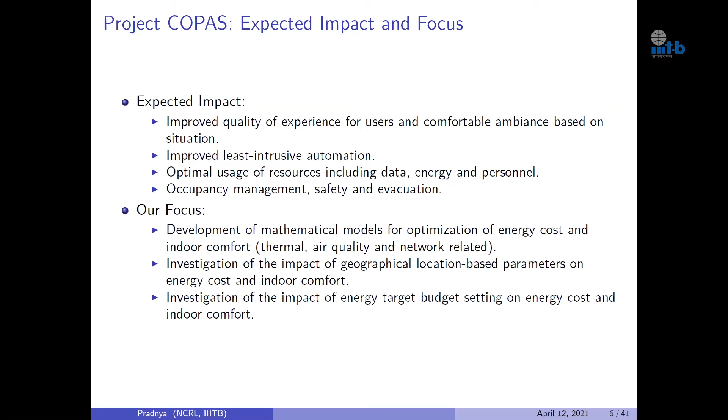We also have looked into the impact of geographical location based parameters on the two important objectives of energy cost and indoor comfort. Further, this work also investigated the impact of energy target budget setting on energy cost and indoor comfort. We will shortly look into what energy target budget setting means, and we'll get into the details of it. So, with this in mind, let's start with the actuals of the talk.

So, first, let's look into the concept of smart and green buildings. We have been hearing these terms quite often today, right? But smart and green buildings are a bit different from each other. We'll see how. Smart buildings are enabled with integrated technology. This is something which we all know. It also takes into consideration the aspects of occupancy management, that is majorly concerning the people in the buildings, the number of people majorly, and their activity, and they strive for operational efficiency, right?

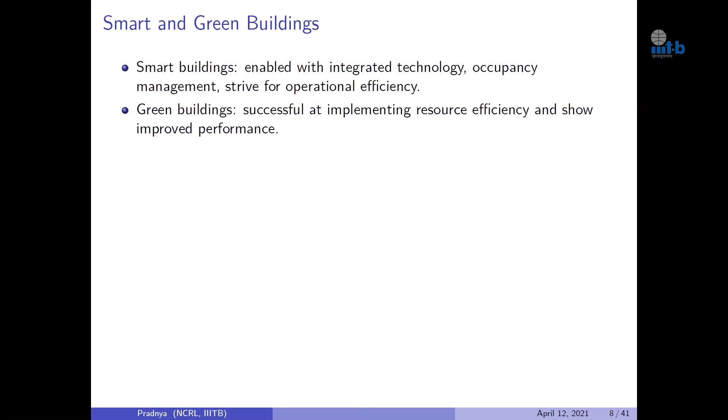But green buildings are the ones which are considered successful at implementing resource efficiency and have shown improved performance. There is a body which looks into the verification and certification of buildings. Basically, they are termed green only when a body called LEED, Leadership in Energy and Environmental Design, provides them with a certification. Correct?

So this is a small diagram which shows you what are the different aspects of green buildings and smart buildings and what things they have in common, correct? So as you see on the extreme left, indoor environment and comfort, energy, water, materials and resources, design and innovation, along with optimization methods, monitoring systems, measurement, commissioning, and control systems are the aspects of green buildings. And when the building has all these things in place is when they are given the certification by LEED.

The other aspects that make the building smart are basically related to the automation and technology that is there in the buildings, which majorly consists of the HVAC or the AC units, lighting, power, etc. So, this is what smart and green buildings are in a gist.

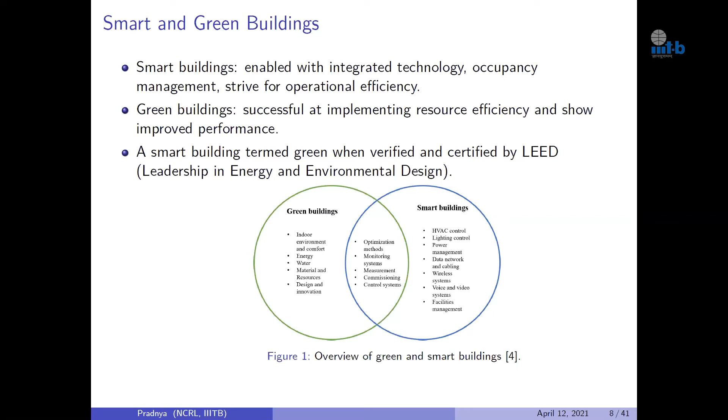So, moving on to the other important aspect of smart buildings today, which is Internet of Things, correct? Now, IoT or Internet of Things is majorly in place today to enable buildings with technology and integration, right? It includes the data network, the voice and video systems, the communication backbone, the things which are majorly concerned when we want to have a connected type of community today, which means one building has connectivity within its internal spaces, and it is also capable of communicating with the other buildings in the vicinity if required, right?

Not only this, but it is enabled with data collection from other groups of buildings in order to make sure that optimization strategies are in place, leading to a sustainable community.

Other terms that you might have heard regarding usage of Internet of Things in buildings are data analysis, software and cloud computing for policy making, security and privacy, of course, energy saving, and integration with the power grid, right? So all these aspects are covered under the umbrella of Internet of Things.

Moving on, now when we say we are talking about smart buildings, the other thing that comes into picture is something called the building envelope, right? And its thermal performance. Building envelope basically means the outermost structure of the building, which includes the roofs, the walls, the windows, doors, etc. Why this leads to the idea of thermal performance of the building is because a building is largely affected by its environment.

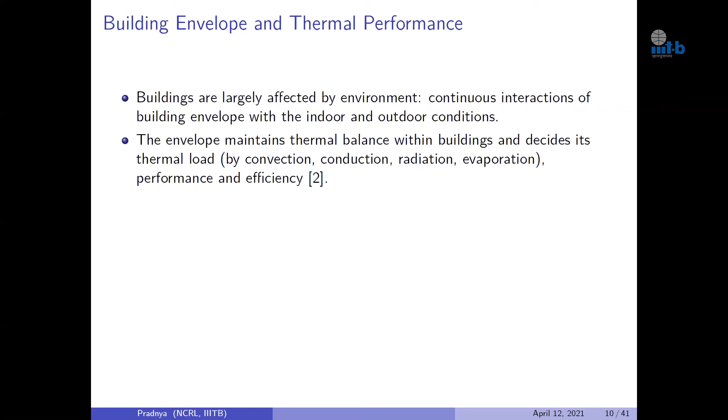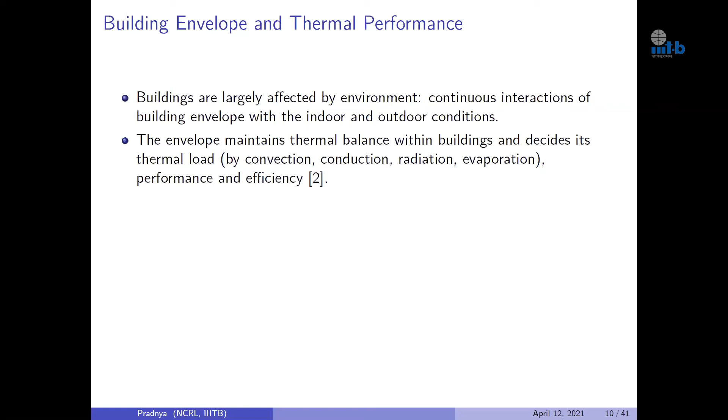It's not a standalone system, it is continuously interacting with the indoor and the outdoor conditions to which it is subjected, right? The envelope is responsible for maintaining the thermal balance within the buildings, and this is called the thermal load. You might have heard of terms like convection, conduction, radiation, evaporation, etc. As far as the various processes in the space are concerned, all these are applicable to how the building interacts with its environment, and they directly determine the performance and the efficiency of the building.

So, the other immediate effect of this is that it influences the choice of heating, ventilation, and air conditioning units in the building, right? So, depending on how big the building is, what types of materials are used in the building, the number of doors and windows, whether they are glazed, unglazed, etc. All this helps to figure out the capacity and the performance of the HVAC unit that needs to be installed in the building. So it directly implies that careful design and construction of the envelope can ensure efficiency and user comfort both.

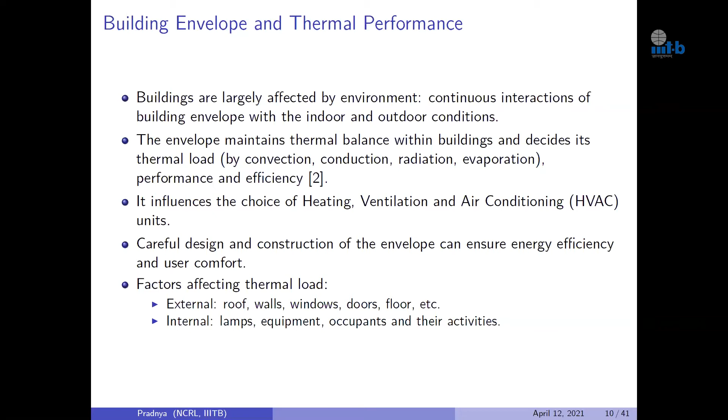As I said, the factors that affect thermal load include externally the roof, walls, windows, doors, floor, etc. And the internal factors include lamps, the equipment which is running in the building, occupants, and their activities, because all this basically goes through the different physical processes in the building, which are responsible for generating heat in the building, right? Which contributes to the thermal load.

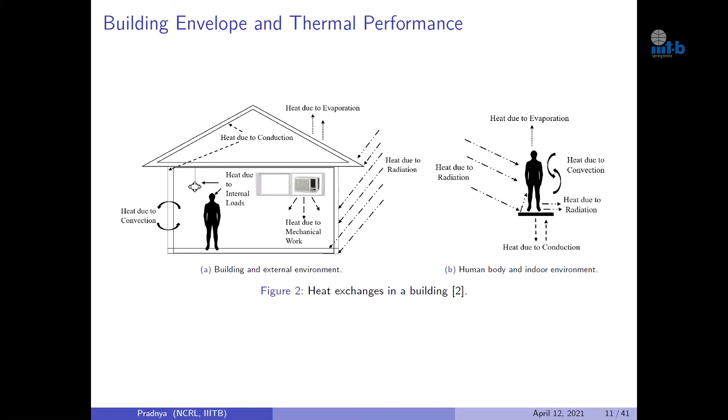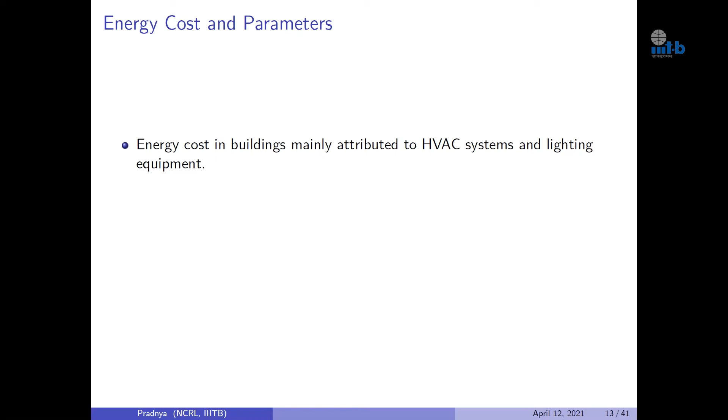Now we get into the two important objectives of optimization in buildings, which are energy cost and indoor comfort, right? Let's first look into the parameters that affect energy cost in buildings. So as I said, HVAC units are the ones which majorly contribute to the energy bills today in buildings. The other group of equipment which is affecting the energy cost is the lighting equipment, but it's not as much as the HVAC system. So mostly works focus on calculating the energy cost of the HVAC systems today.

So it requires us to describe relationships between the demand and supply of energy from various sources that comes to the building, right? So it might be the power grid, the solar energy, you have the backup batteries, etc.

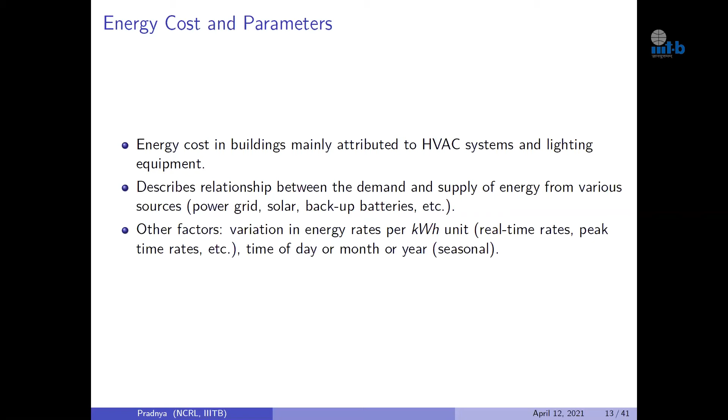Other factors that are included are how the energy is being billed in the given geographical region, right? So, what is the cost per kilowatt hour unit of the energy? So, like we have the slab wise billing that happens in India, there are also other types of strategies which are adopted in other locations, which include real time rates, the peak time rates, etc. And these keep changing based on the seasons or even maybe the time of day. So all these parameters are important when it comes to the calculation of energy cost in a building.

Further, looking into the indoor comfort and parameters. So, generally, indoor comfort includes all those factors which make a person feel comfortable in a building. So, the first thing that comes to our mind is the temperature and the relative humidity, right? And yes, these aspects are directly contributing to the thermal comfort dimension of the building.

The other factors that affect comfort are light intensity, the smells or the odor in the rooms, the CO2 or the carbon dioxide levels, etc., which respectively form the parameters which affect the visual and the olfactory comfort of users in the building, right? So it generally means that all these parameters, ambient parameters, have to be maintained at a desired level so as to have a comfortable environment for the user.

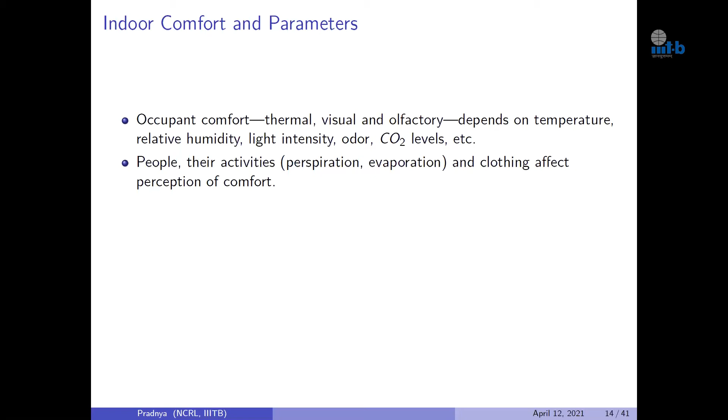The other thing that affects indoor comfort is the people and their activities, because this will directly contribute to how the person is feeling at any given point in time, and it might differ from one person to another. So it's quite subjective in nature, right? Also, the type of clothing that a person is wearing in a given building for the kind of a purpose that the person has been to that building, right? So, if a person is visiting the shopping mall, the person might be wearing very casual clothes, whereas if he or she is in a gym, the kind of activity that the person is doing is very different, right? So, all these factors come into picture.

The other aspect that affects indoor comfort are the type of models that people have proposed today in literature, right? So, one of the existing models is the Fanger's predicted mean vote model, which is called the PMV model for short, and its variants, right? So, this is one of the oldest model that is there in place today, and a lot of variations have been made to these. There is also an air quality model that is proposed by Fanger and which is widely used today. So we will look into both these things in some time.

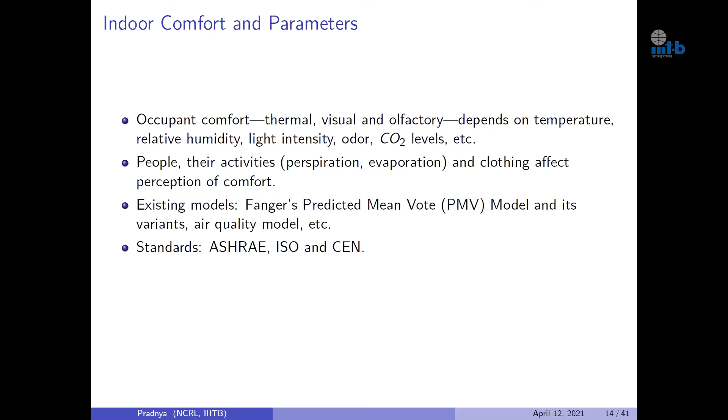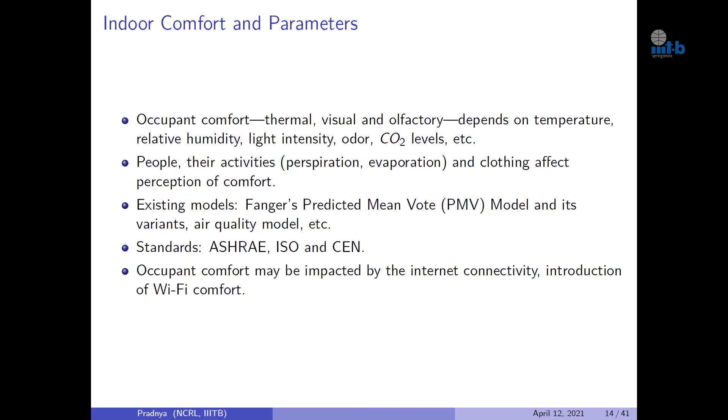The standards that take care of indoor comfort in buildings include the American standard called ASHRAE, the international standard ISO, and the European standard of CEN. One more important thing that I would like to mention here is, of late, we have seen the dependency of occupants on internet connectivity, right? While in any kind of a building. So, in our work, we have also tried to include the quality of experience of internet connectivity as part of indoor comfort for the users, right? So, we have introduced another dimension to comfort, which is called the Wi-Fi comfort. We will also look into this work shortly.

Now, with the idea of indoor comfort and energy cost in mind, let's look into the details of optimization models, right, that are in place in buildings today. So, as you can see, we are dealing here with conflicting objectives, right? So, as far as the operator of the buildings is concerned, they would like to minimize the energy cost that is incurred onto the building at any given time. Whereas, as far as the users are concerned or the occupants are concerned, they would want to have maximum comfort. So, definitely, there is a need to optimize between these two things.

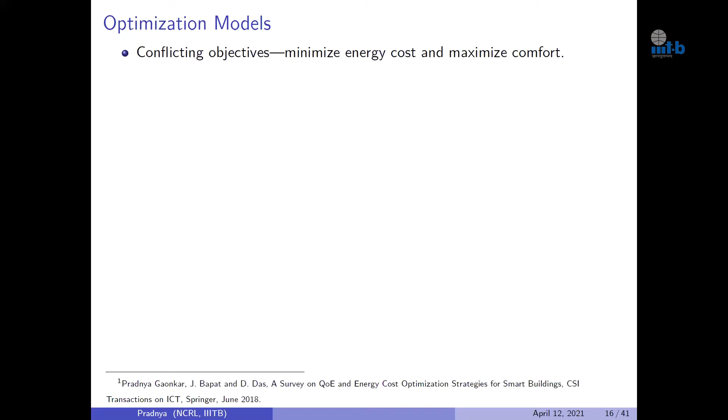So when we are considering so many parameters and objectives, obviously this model is a multivariable, multi-objective type of a model. And based on the complexity of the model, we choose the solution strategies to deal with the model, right? So the other important aspect that comes into play here is the Pareto optimal solution. So obviously, when you see the conflict in between these two objectives, we know that there is no single solution that can help us to solve this model, right, or the problem.

So in one of our works, which is a survey on the different types of optimization models in place today for buildings, we have tried to categorize the different types of strategies used for finding solutions to such problems, right? So you see that there's a huge bag of optimization strategies here, which goes from direct search to integer programming to the meta heuristic type of algorithms that we have today, right?

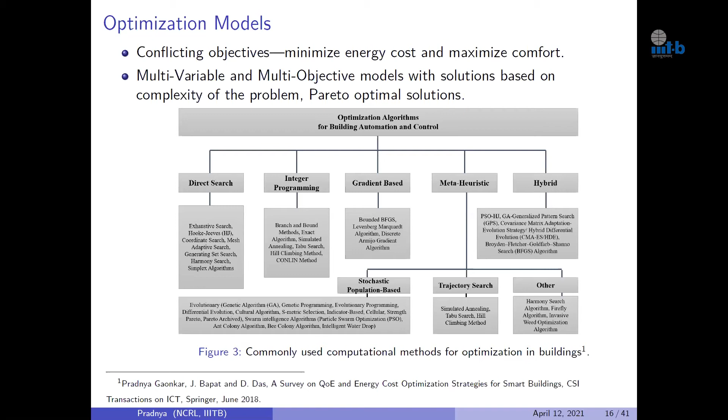And the stochastic population-based ones, which are very popular, including the evolutionary type, or majorly the GA and PSO type of algorithms, right? So this is just one figure in which we can include the variety of solution strategies adopted today for the optimization models in buildings.

Yeah. So, what is the exact problem that we're dealing with as far as our work on optimization strategies for buildings is concerned? We have looked into the system modeling and optimization of energy efficiency and indoor comfort for both public as well as semi-public buildings.

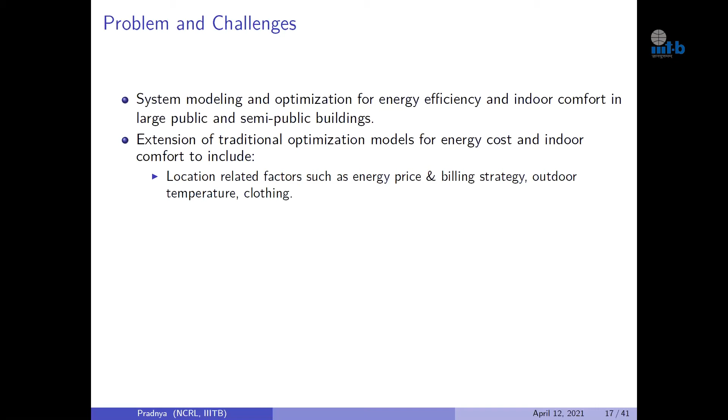We have majorly looked into extending the traditional optimization models for energy and indoor comfort to include, first of all, the location-related factors such as the energy price and the billing strategy, the outdoor temperature, and the clothing. As you see, these three factors are directly the result of the geographical location of the building, right? Secondly, the occupant's behavior and occupancy patterns, which are very much variable in nature.

So, what are the challenges which we have tried to address in this work? Basically, as I said, the dynamic nature of indoor environments, which arises from the occupancy, heat load, and occupants' behavior; the non-linear energy costs because of the location and the government regulations, equipment usage, etc. And of course, because of the subjectivity involved in user comfort, the complexity in the expression of user comfort on its own, because of the factors we just saw earlier.

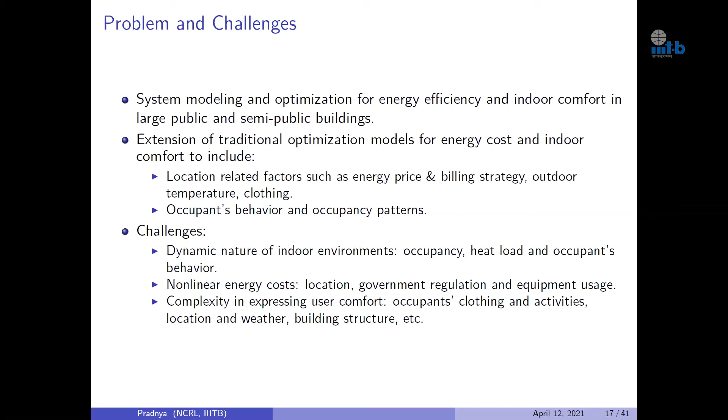Okay, so let's look into the proposed approaches as far as the project and this work is concerned. I have created three subtopics here so that we can look into the contributions of the work individually. First we will look into the location awareness and multidimensional comfort. Then we will talk about the energy budget concept and the optimization model that we have proposed, taking into consideration this concept.

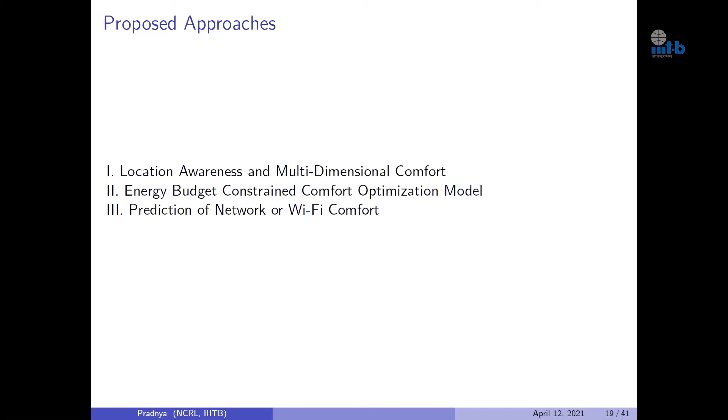And as I said earlier in this talk, we have also introduced an additional dimension to the comfort part, which is called the Wi-Fi comfort. We will also look into that work, right? So, let's first look into location awareness and multidimensional comfort. This is an overview of what we are going to discuss further in the slides.

You see this small dotted orange line, which basically says that there are two sub-models of optimization that we are going to speak about. The first one, the optimization model on the top here, takes into consideration two objectives, the energy cost and the thermal discomfort. They depend upon the factors listed here: the energy price and the targets, the building structure related parameters, which we have already discussed, the equipment, etc.

The other category of input is basically everything that is affected by the location, that is the temperature, the occupancy, clothing, and activity. These form the energy cost and the thermal comfort objectives, which are optimized, and the output of this model includes the desired comfort, the target energy cost, and building management guidelines in general.

The other optimization model that we are working on is an extension of the previous optimization model to include the additional dimension of air quality comfort, as you see here. We see that air quality is majorly affected by two factors in a building.

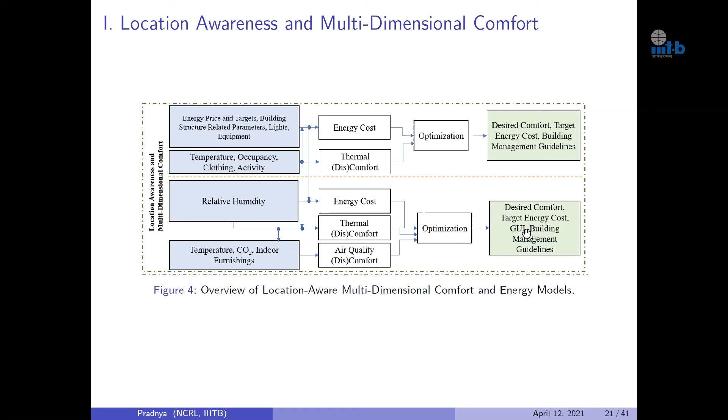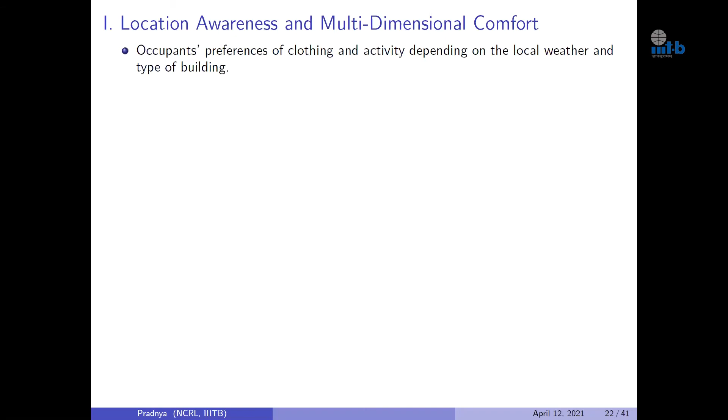Okay, so with this in mind, let's see what location awareness and multidimensional comfort for the first model include. As I said, occupants' preferences of clothing and activity depend on the local weather and the type of the building. This is a glimpse of how our energy cost function might look. This is a curve fit model that we have proposed here. You see that the slab-wise energy tariff, which exists in India today, is taken into consideration.

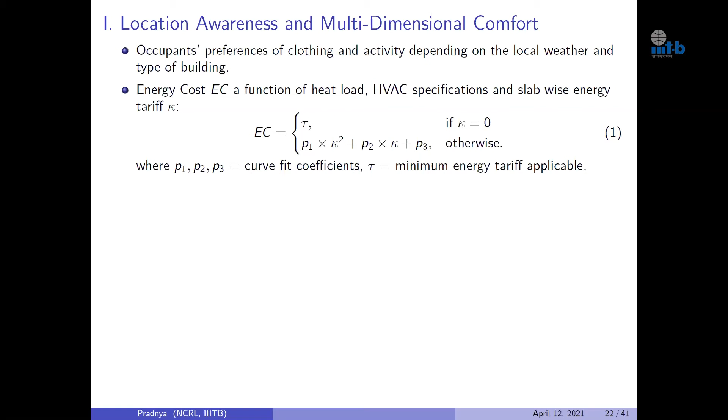So, it's a polynomial fit that basically depends upon the energy tariff in the region. So, this is the energy cost function part of it.

As I said in the earlier slides, the predicted mean vote model by Fanger is considered as one of the standard models for indoor comfort or thermal comfort today. It includes all these factors, right? There's a big list of factors. It includes the air temperature, the mean radiant temperature, air velocity, partial pressure, the metabolic rate or the activity of the person, the clothing insulation factor, etc. Right. So with all this, we can get a clear indication of what might be the estimate of indoor thermal comfort that we are looking at any given time for a particular group of people.

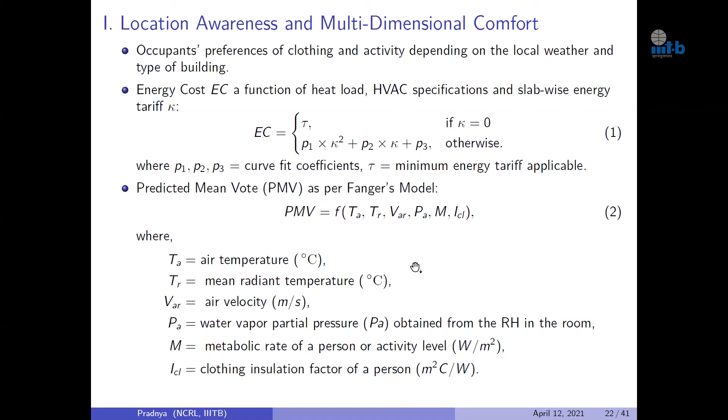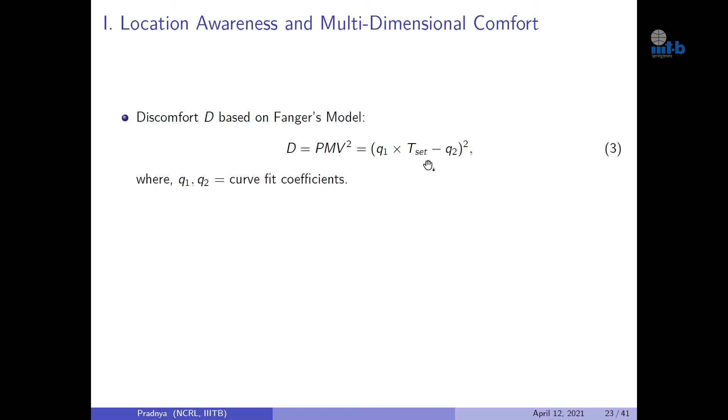Right. So we have used this particular measure or index of PMV in order to define the thermal discomfort this way, right? So we have described discomfort D as PMV squared, right? And the comfort model for it has been proposed based on the control variable, which is T set. T set is the temperature setting or the AC setting in the room or the building.

So we have used the weighted aggregation method in order to solve this, which includes providing each of the two normalized values of the objectives EC and D weighted in a particular way. That is, W1 plus W2 is equal to 1, right? So they are provided with weights such that they both equate to 1. So according to the preference, whether you want to make sure that your solution is energy cost centric or occupant centric, you can accordingly vary these weights so as to have a customized kind of a solution, right?

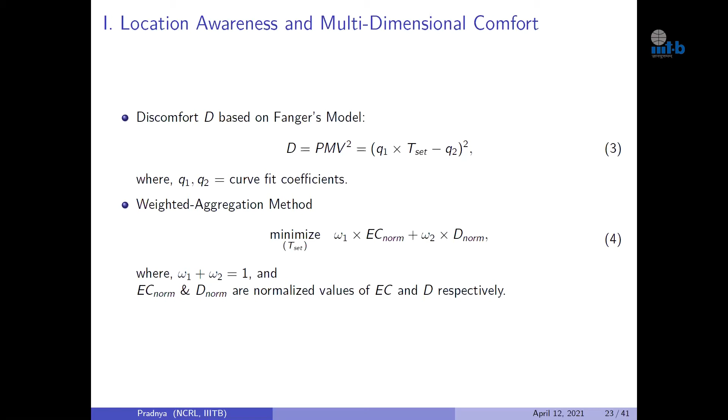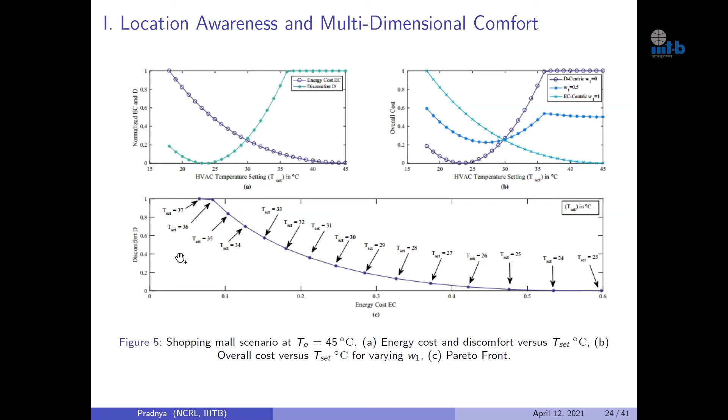Also, the Pareto front for the Pareto optimal solution based on the control variable T set is also shown in the subplot here. The extension of this work to include the effects of temperature and relative humidity on indoor furnishings such as carpets and paints has also been looked into. So basically, the emissions from carpets, paints, sealants, PVC, etc., which are used as furnishings in the buildings, directly contribute to the indoor air quality.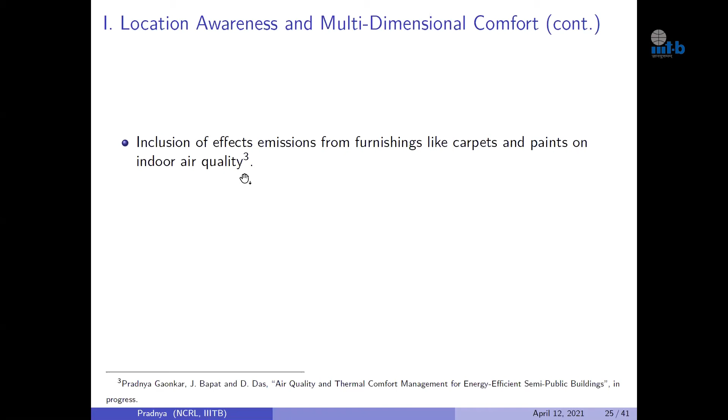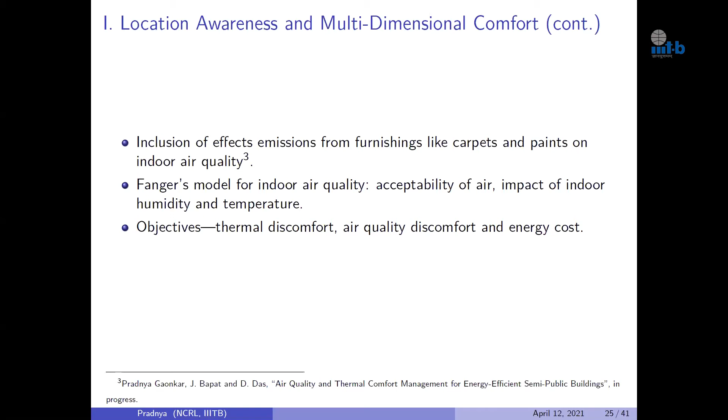So, as per Fanger's model of indoor air quality, there is an index which he puts forth, which is called the acceptability of air. So, based on the acceptability of air, you can describe the discomfort due to indoor air quality in a building. So, the objectives that we are majorly looking into are these three, right? So, this is work in progress. So basically we follow the same sort of process in order to arrive at the Pareto optimal solutions.

Now let's look into the second sub area, which is the energy budget constrained comfort optimization model for energy efficient buildings. So, as I said, there's a concept called target budget setting for smart buildings, right? So, if the operator wants to set a particular energy budget for the building, he or she can do so, whether it is for a few months or for the whole year or for a few weeks, etc. So, this can be done based on the volume of the building, right?

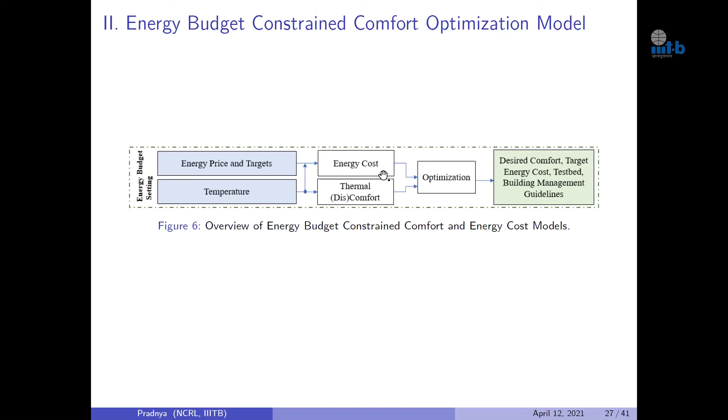So basically, you need to know how the energy prices in the region are, and you need to do a small survey in order to see how you can set a particular energy budget which you don't cross at the set time in that particular region. Obviously, the dominant ambient parameter that we have considered over here is temperature. The optimization model again is based on two conflicting objectives of energy cost and thermal discomfort, right? So, the optimization model looks something like this. We have developed it based on the difference in the temperature Ts and Tc.

Ts is the set temperature of the HVAC, and Tc is the temperature which we call the temperature which is desirable by the user. So the more the difference between these two temperatures, it directly affects how the person is feeling in the room, correct? Now, C is the comfort.

We have used only one parameter, as I said, as a control variable, which is Ts, or the setting of the HVAC unit in the building. So as you see here, it's a constraint model, and EC, or the energy cost, is always required to be less than or equal to a value M, which is the maximum energy budget set for the volume of the building, which is in INR per meter cube. Okay, so this depends on the size of the building.

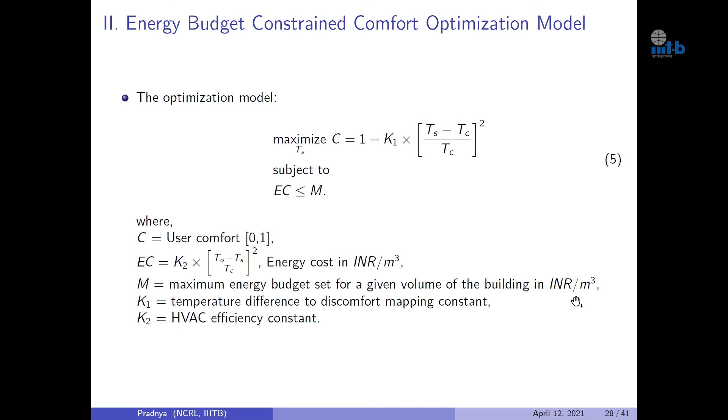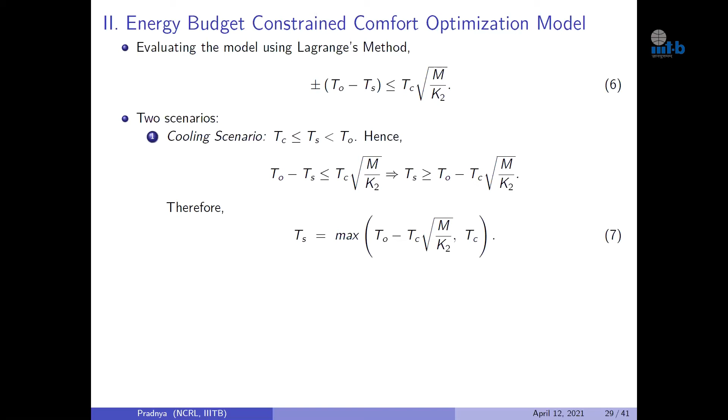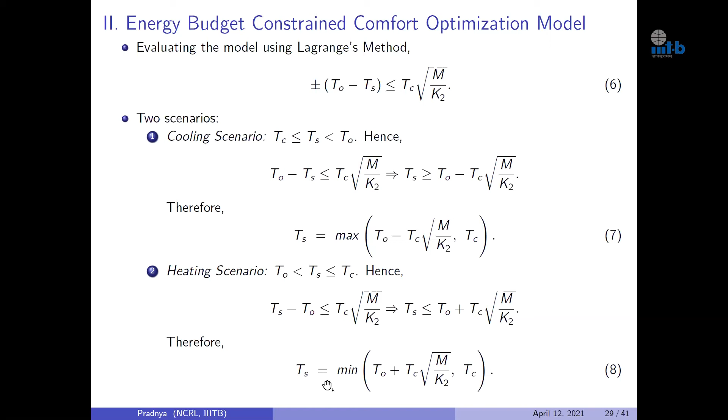So as a constraint model, we have used the Lagrange method to find the solution to it, and you see that it is dependent on the value of M, which is the energy budget set for the building. It is evaluated for two scenarios: first the cooling scenario, and then the heating scenario, depending on the weather, right? So majorly, it requires you to figure out what is the Ts, or the best setting of your AC, that is required in the given season.

Okay, so this result shows us what we are looking into as far as the optimization model is concerned, right? The contour plot is basically for the user comfort. Considering that the outdoor temperature varies from 0 to say 40, and we have set a reference comfort temperature of the user, Tc equal to 20, as you increase the energy budget M, the user comfort is seen to get better, right? The scale is from 0.1 to 1. So at about 600, the value is seen to be the best, which is equal to 1.

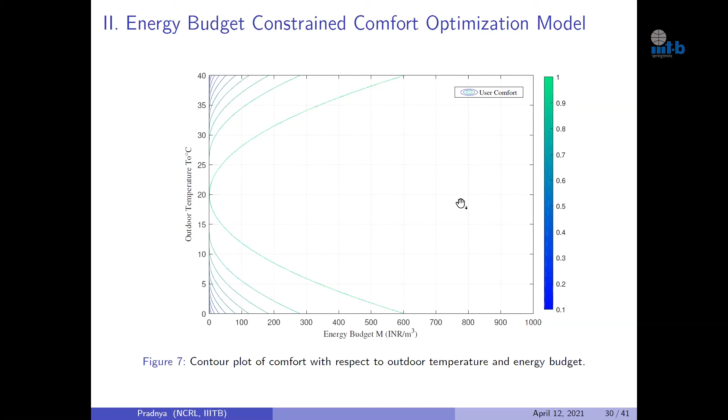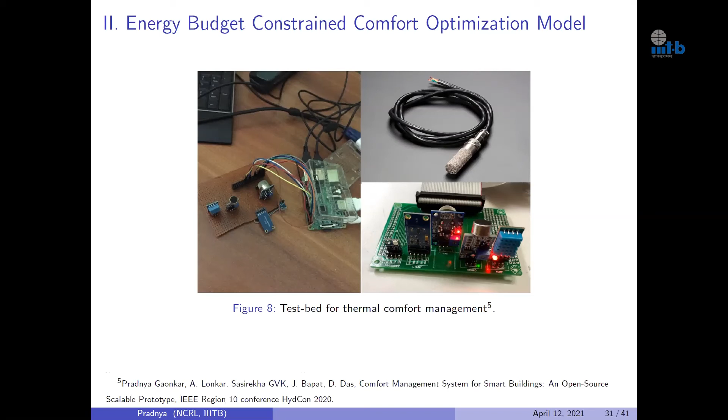We have looked into aspects of the building which are quite variable as far as Wi-Fi comfort is concerned. So what affects this dimension of comfort? First of all, the occupancy: whether the person is sitting in a place accessing the Wi-Fi, or whether the person is mobile. Secondly, the location: does the person experience too many drops of connectivity, or is it seamless? The Wi-Fi RSSI, the received signal strength indicator, or the power of the Wi-Fi that a user receives at any point in time, and of course the time for which the user is using it for a specific type of service or application, right?

So we have used a classification model to describe comfort and find out the quality of experience of comfort in a building. The general outputs again include the desired comfort, target management cost, and building management guidelines.

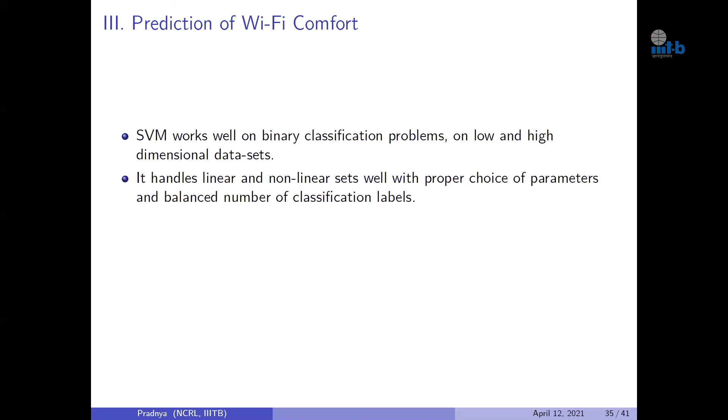And we have used the comfort levels to be just binary to start off with, because this was like the feasibility study and understanding the whole concept part of it. But this obviously can be extended to include more classes of comfort at any given point in time for the different categories of applications. Now, the choice of SVM was because it works well with binary classification problems on both low and high dimensional data sets, right? Also, it handles the linearity and non-linearity of sets well, obviously with a proper choice of parameters, and of course, with balanced number of classification labels.

So we have tried working with three data sets, which are basically Wi-Fi fingerprinting data sets, which were available from UCI, IEEE DataPort, and also we have collected data from our own institute for this purpose. The fine tuning of the hyperparameters of the SVM model was done based on the grid search algorithm, right? So C and gamma, as the hyperparameters, were decided only after fine tuning using the grid search algorithm.

So this is just a glimpse of the results that we obtained from the study. The first one that you see over here in figure 10A is the receiver operating characteristics. It's a plot of the true positive rate and the false positive rate that we obtained with the data set. This is with the UCI data set, because we found that data set to be the most balanced data set amongst the three. As you see, the area under the curve for the blue line here, which is SVM with grid search, is much better, that is 0.99. Whereas with untuned parameters of SVM, we see that the area under the curve is quite poor as compared to the blue one.

The other way of expressing the quality of experience, or QoE, was to show the system performance with respect to the number of APs, or the access points in the room or the building, right? So we have done this for two applications or services. First of all, email, and second one is the video stream, right? So obviously, it goes along with our intuition, where we see that as you increase the number of APs in the room, the quality of experience that is seen by the users increases.

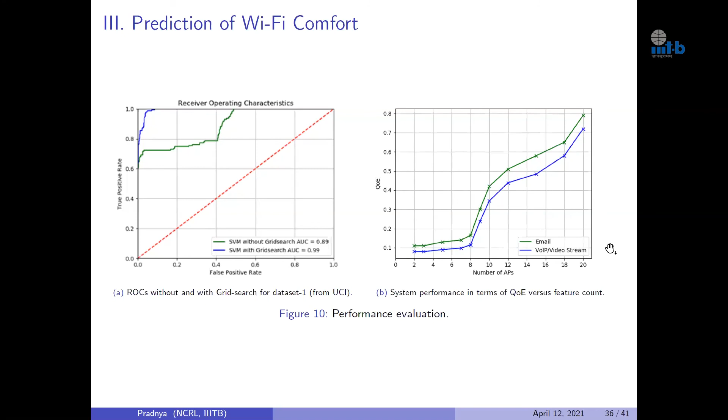So this brings us to the conclusions and future work. As far as the conclusions are concerned, we have explored scenarios in public buildings and evaluated them to propose energy efficient optimization models for user comfort. Impact of factors such as location, energy budget setting, and Wi-Fi connectivity has been investigated. And possible extensions of the work include proposing additional dimensions to comfort with focus on light intensity and audio levels, inclusion of energy consumption of humidifiers, which become an important aspect of HVAC today. Like it comes integrated with the HVAC. So looking into the cost model for that also becomes an important aspect.

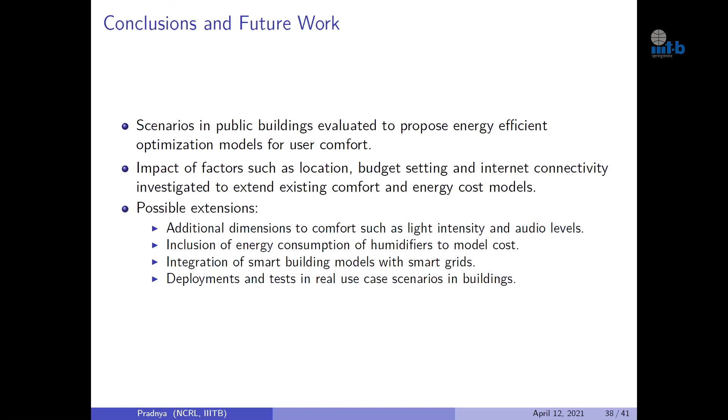And integration of smart building models with smart grids, right? So this is another important area where people are moving today. So this also could be a possible extension of the work. And more deployments and tests in real use case scenarios in buildings to get a practical feel of the work is also something that can be looked into. So these are some of the references, and that brings us to the end of the talk.